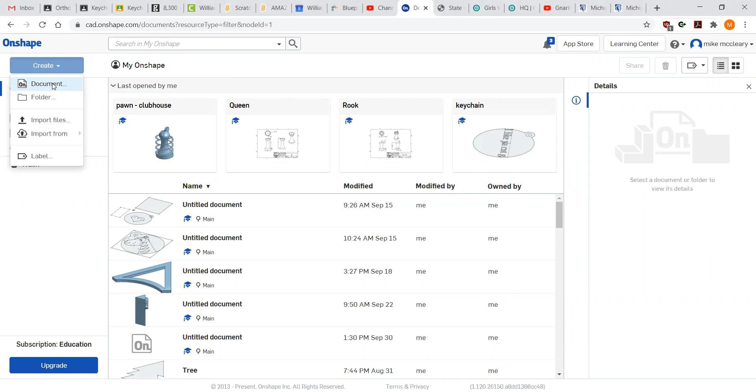Light switch toggle. We'll do a toggle one. The dimensions for the rocker are in the assignment, you can just follow those. If you have a light switch plate that accommodates more than one toggle and/or rocker, you can find the dimensions online. You just search up light switch plate 3 gang. Usually they're 3.

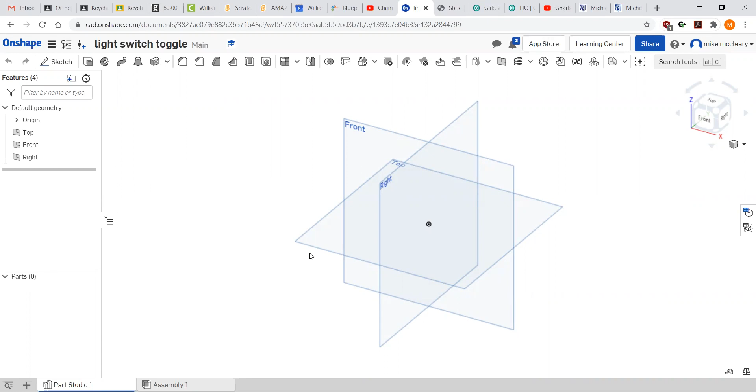If you want to do an outlet plate, you certainly may. However, I've never actually found good dimensions online. If you can find the dimensions for an outlet switch, by all means, if you find them, let me know. I will totally accept those as well. But you'd have to do a little research on your own.

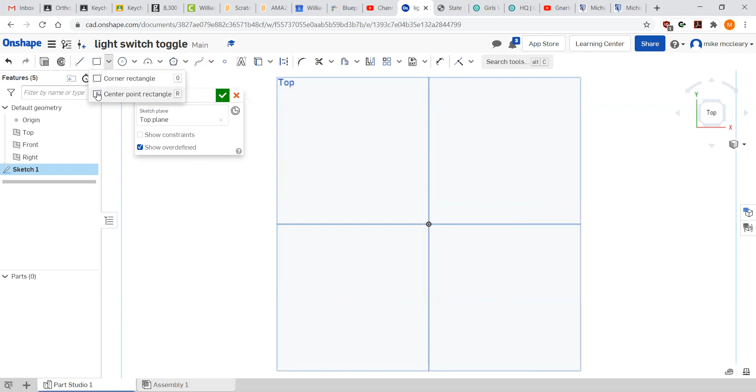All right, so we're going to start with a sketch on the top because this is going to be a flat thing. And so usually I use a rectangle, but for a light switch plate, I want a center point rectangle. I believe you've used them in the first intro. What this does is it allows it to be centered, which is going to make it a lot easier to put the holes on for both the bolts and the toggle itself.

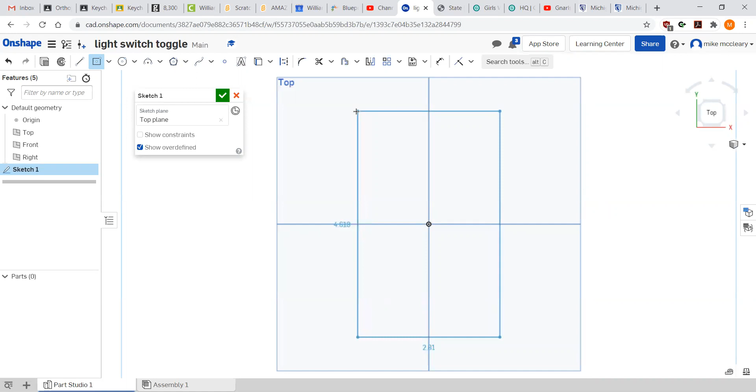And so if I go through here, it is, I believe - oh darn it, keeps on switching. Stop switching. So it is 2.75, 4.5.

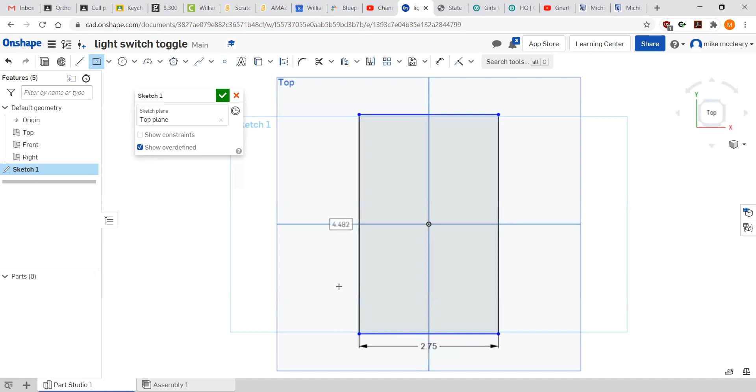And then I'll make another center point rectangle in the middle here. And since I'm making a toggle, it's going to be 3/8 or 0.375. Oh darn it, that one is 1. This one is 0.375, 3/8 of an inch. If you want it to be a little looser, you can go all the way up to 0.38.

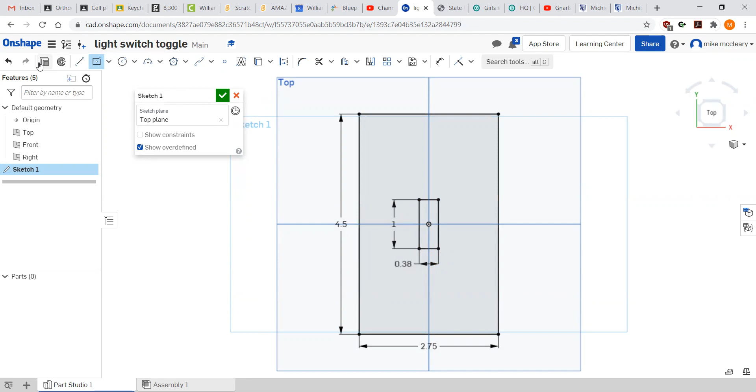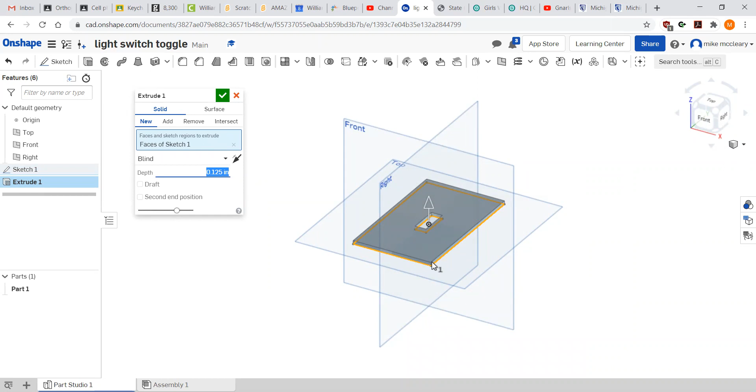It'll be fine. And then I'm going to extrude this - oh not rectangle, extrude. Going to look at it in 3D, just make sure it's showing what I wanted to see. And I'm going to do 1/8 or 0.125. The instructions show the thickness of various different materials they're commonly made out of, but this particular material on the 3D printer, 1/8 works well. So we're going to do 1/8.

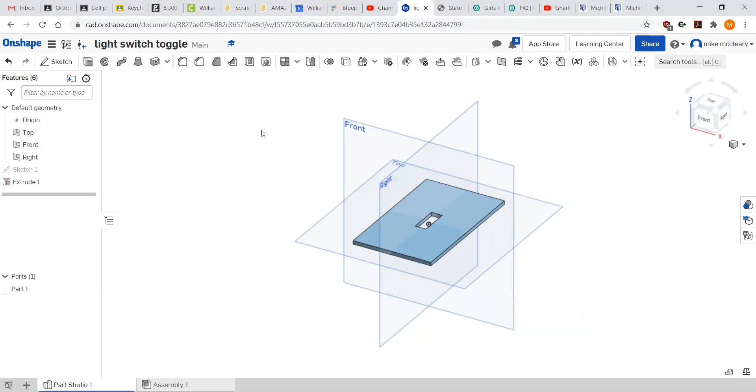You'll notice I didn't do the holes for the bolts because I'm going to use the hole command. The hole command requires different stuff than just putting a hole in it. You're going to need to put down some points, make sure the points are in the right location, use the hole command, and then tell it what bolt you're using to attach it to the wall.

So I'm going to start a sketch on the front here. Go back to the top view. And I'm going to use a point. I'm just going to put 1 point up there and put 1 point down there. I'm going to go over to dimensions.

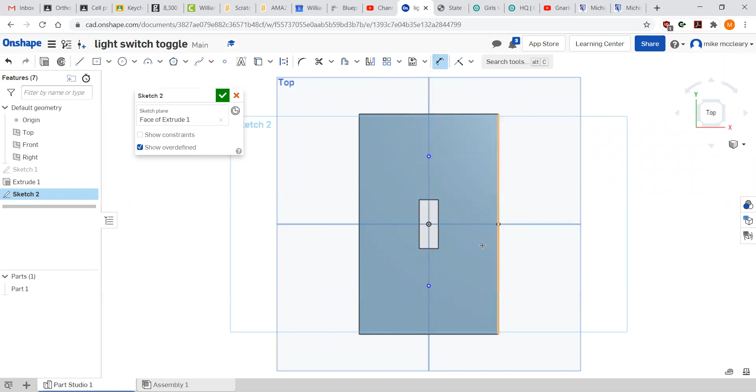Now, between these two needs to be 2 3/8. And it needs to be centered. So I'm going to do a dimension between one of them and one edge and here.

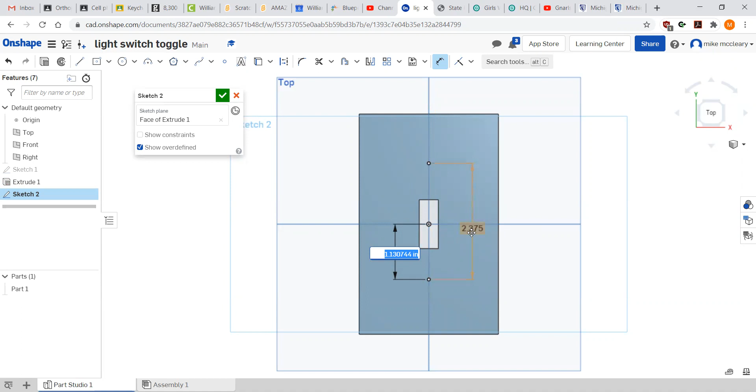Now, hopefully, you can figure out in your head how big that needs to be. I'll give you a hint. The distance between here and here needs to be the same as the distance between here and here, and they all have to add up to this. Also, the distance between here and here and the distance between here and here need to be the same. So this plus itself, x plus x, 2x, equals this. Divide both sides by 2. This divided by 2.

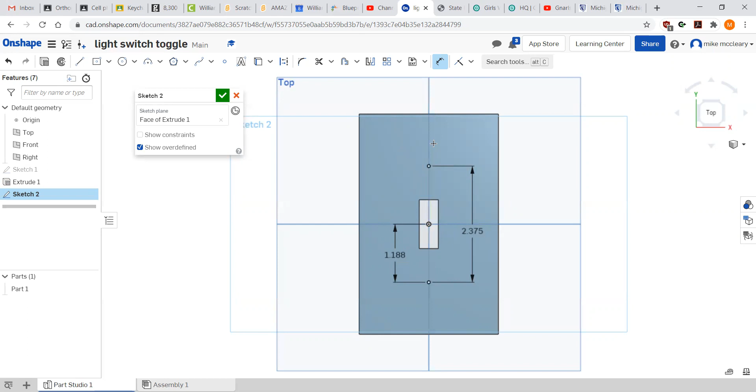And you can do division if you want. There you go. It should be on that center line. If you didn't do this, you're going to need to have some dimensions that go to the edge that make it in the center.

All right, then we're going to do a hole command. We want ANSI. We want number 6, which I believe is the default. If it's not, make sure you do number 6. It doesn't actually have anything to do with its actual size, it's just the name of the size.

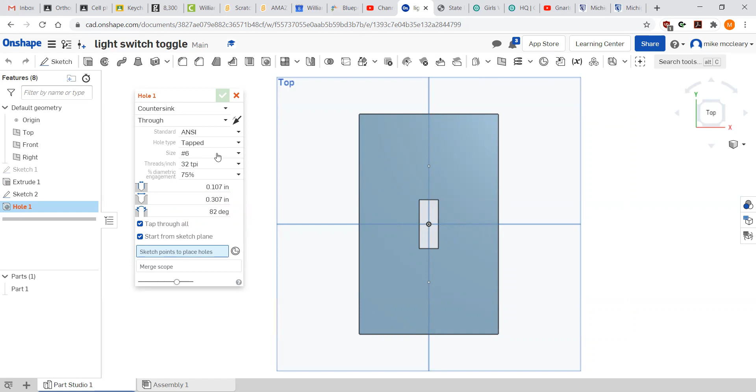And you click on both the points, and then you have some holes that are countersunk. I look again at it in 3 dimensions. There it is.

Now for everything in this assignment, you need to have a design on it. If you just give me this, if this is early in the process, I just won't accept it. If this is late in the process and you're behind, this is definitely not going to be 100%. This is going to be C at best.

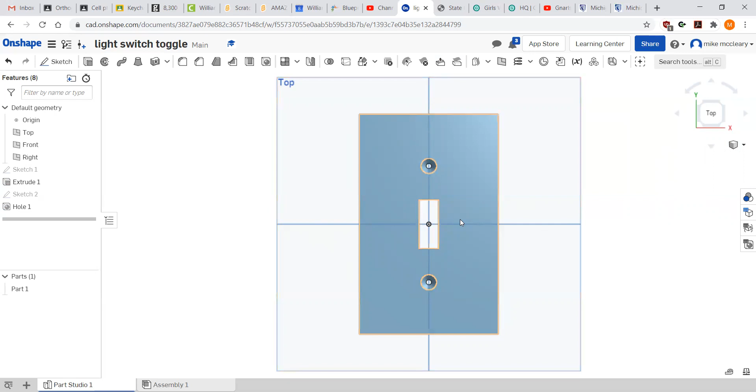Don't try to give me something that you could just pick up at Home Depot for 59 cents. Make it your own. So there's a lot of different things people have done. Put little hearts on it. Someone once made a little snowman with little snowflakes going. It took forever to print, but it looked really nice when they were done.

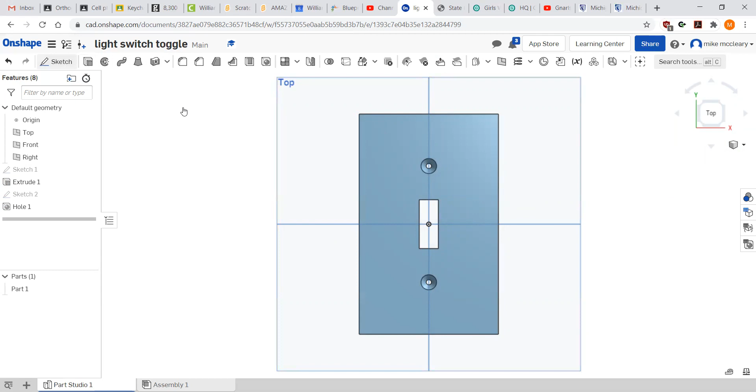One design that I always enjoy, and because I keep using it as an example, people do it every so often. Going up here and - see how well I can draw this. Why are these not... oh, so, there we go. It wasn't selecting the sketch.

All right, I'm just going to draw it loosely because I can. And then there's text. There it is.

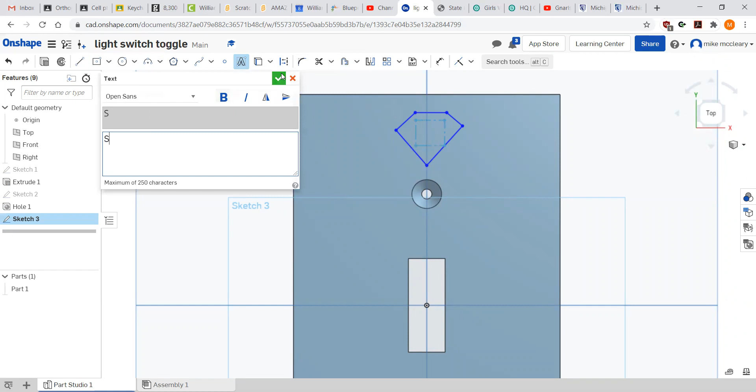People do a better job when you have more time. Down here, let's see how well I can draw this freehand.

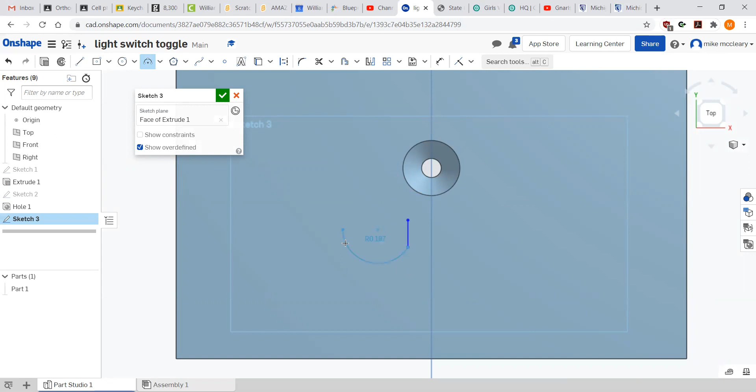The answer is pretty poorly. It is not a really good job, but hopefully you'll be able to see what I'm drawing at the end here.

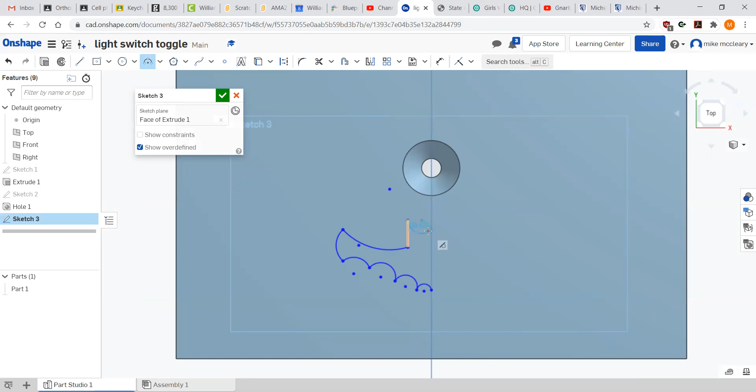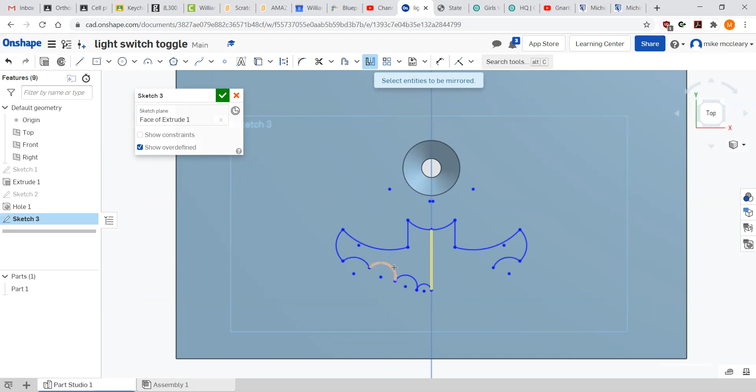Mirror this guy. Mirror line. Entities to be mirrored. All right.

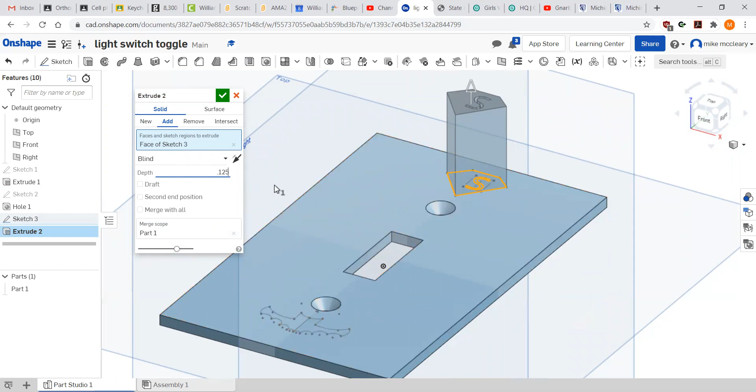And we've got Superman in the light. Let's do it 1/8 of an inch about. And Batman in the dark, because he draws his energy from the sun. He's the Dark Knight, up, down.

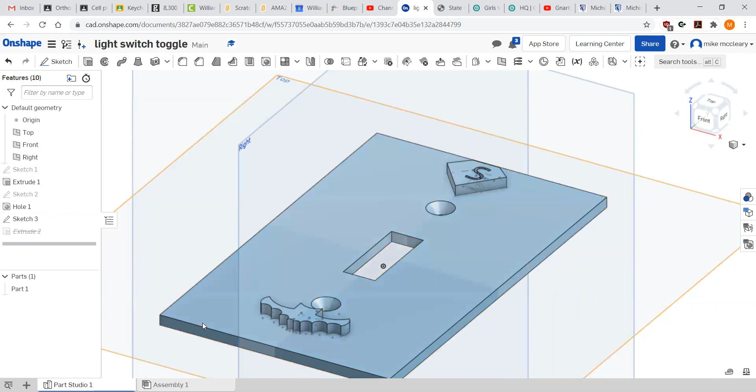I enjoy it. I'm just going to hide those guys, though, for now. Suppress. Hide. Oh, why are you not hiding? There you go. Other things people have done.

This is kind of the laziest one, but people still do it. When you're doing this, let's make sure it's not doing its align thing. All right, well, make sure that they're even if you're doing this one.

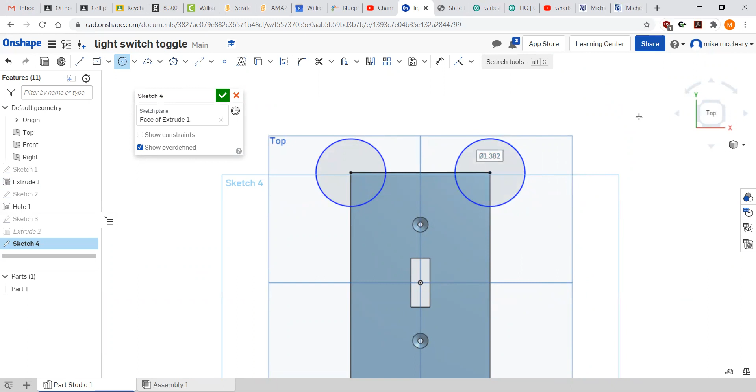This is just covering up a wall. As long as you cover up the hole in your wall, you can do this. You can go outside the bounds of a light switch plate, which is fine. If you make it too large for the 3D printing plate, I will return it and say this is too big, you can't do this. But as long as it's physically possible to print, yeah, you can totally go outside.

I've had different Pokemon, cats, fox faces, various animal shapes. Of course, Mickey Mouse. Lots of palm trees and waves and beach scenes have gone into this.

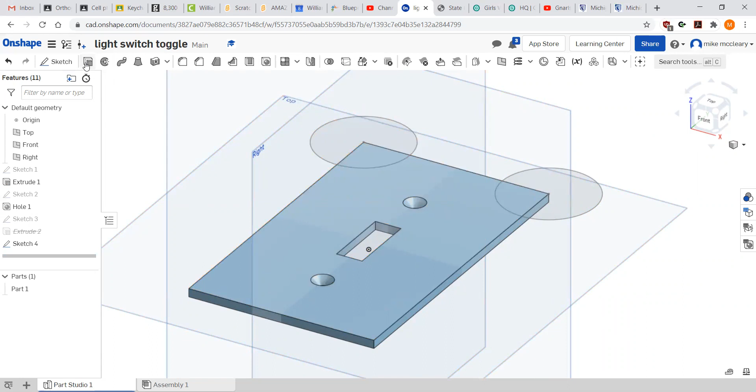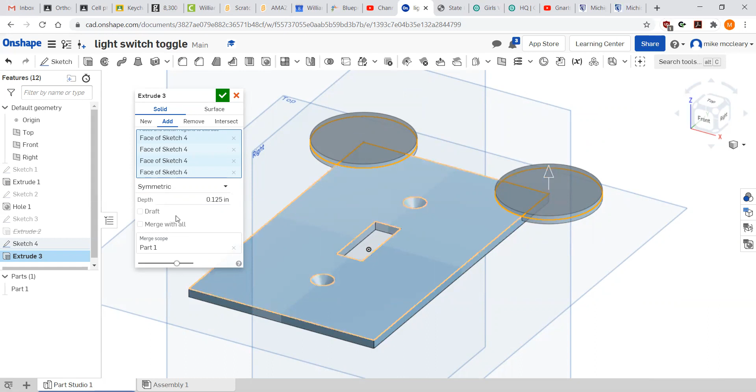One thing though, if you're going to go outside, make sure that you are going behind so that it lines up with the back. So I'm doing symmetric at 1/8. Since this was extruded an eighth, it goes 1/8 of an inch up and 1/8 of an inch down. Or I can change the direction and go just 1/8 of an inch down. But it should, when you look from the side... oh, something went wrong there. No.

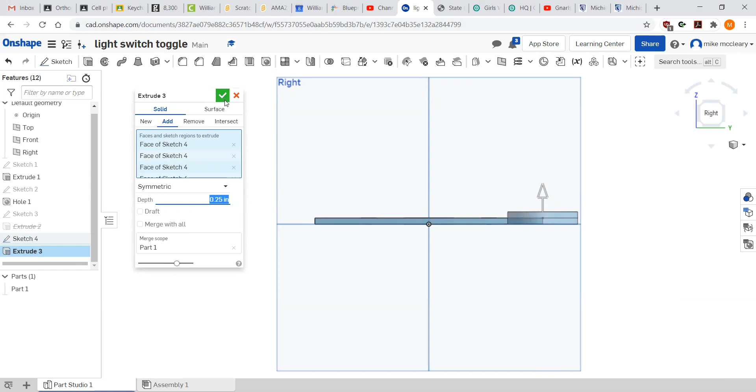A little different in this one. 1/4 of an inch, because 1/8 of an inch total... so 1/4 of an inch total, 1/8 of an inch down, 1/8 of an inch up. It needs to line up with the bottom, or else it's not going to print well. Basically, you're going to get stringy bits underneath the ears, and they're going to curl, and it's just going to look bad. At worst, it'll just ruin the entire part because it'll warp everything, and it won't do what you're looking to do.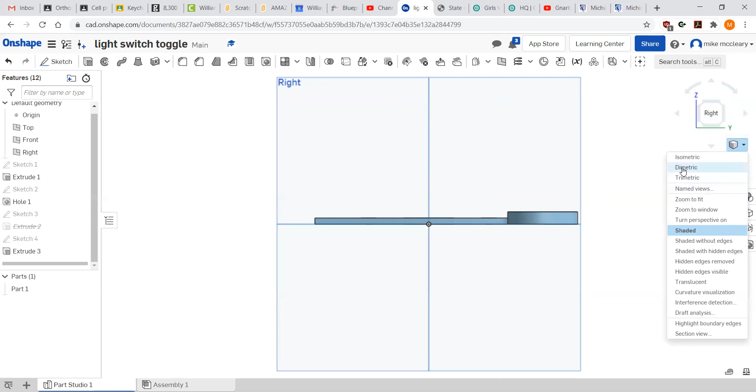So making sure you match with the outside - not important. Actually, wait, one more thing: 0.125. Let's go and do these as a fillet. It looks nicer.

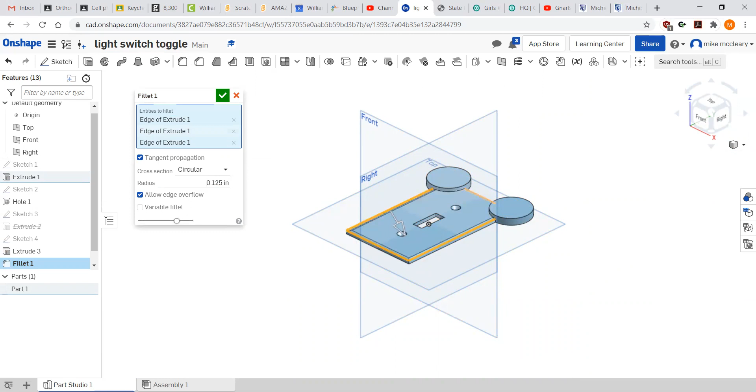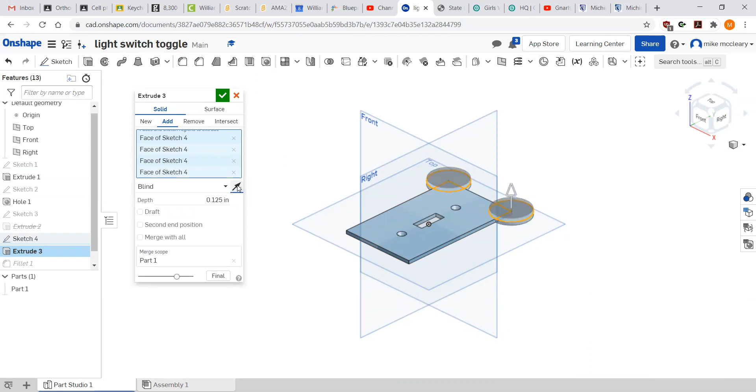I waited on the fillet till the ears were drawn, so it looks like that. If you wanted to do the ears like this, extrude by 1/8, and instead of symmetric blind, change the direction there. You'd also fillet there. It becomes one continuous fillet.

You should probably fillet the edges, particularly if you're doing a square one. It looks a lot nicer and doesn't look like you're just screwing a piece of plastic into the wall.

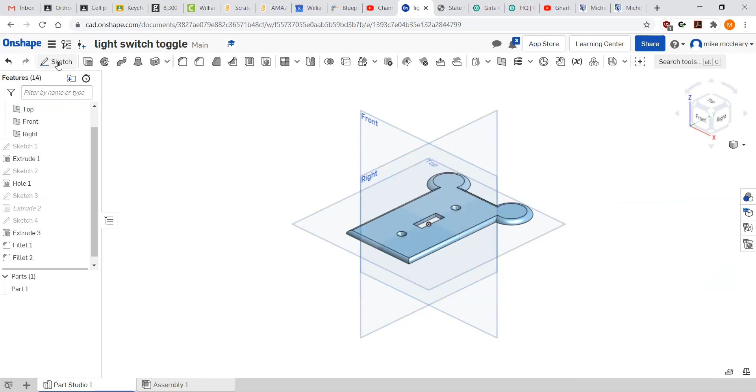These ones have the tendency to be a little easier than the lights or than the cell phone cases. It gives you a little broader canvas to do a design on. Generally, they're less popular because people like cell phones.

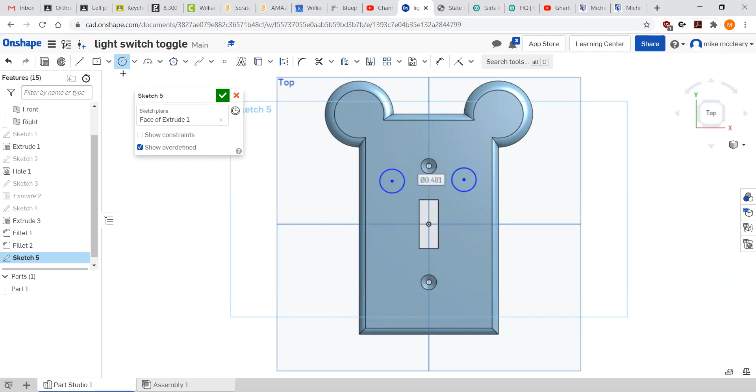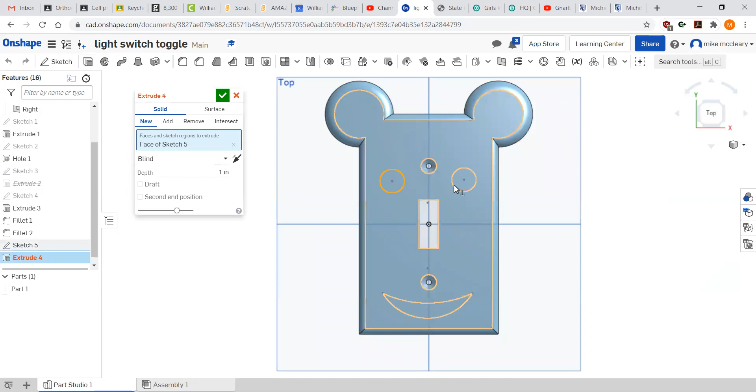But these will also last you a lot longer, because if they sit there on your wall, they're not going to break when you get a new cell phone. You don't need to change out your light switch plate. These will generally stay in place for years, as opposed to a cell phone case where you'll keep it for a while, and then it'll go away.

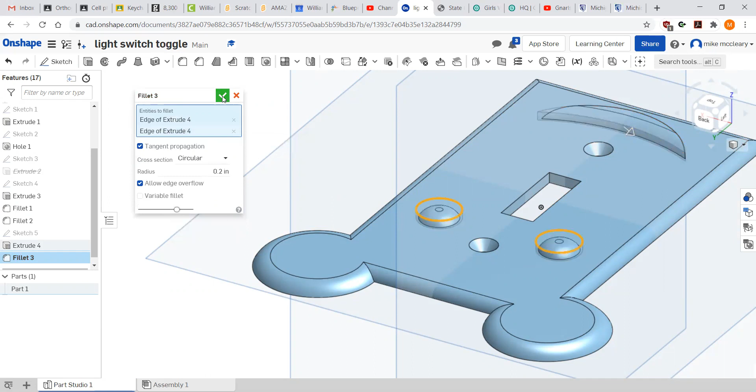But even though I say that I like them, they are in fact less popular than the cell phone cases.

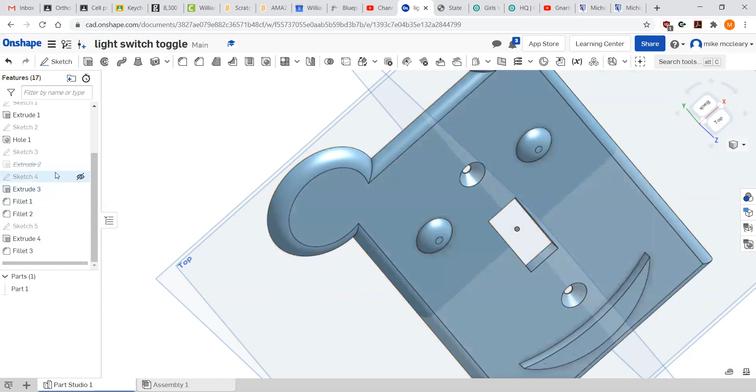So there's one that says hello, or you can say hello and... oh no, that's not what I wanted. I wanted this one to be unsuppressed. And now it is a Batman, Superman, Mickey Mouse, whatever.

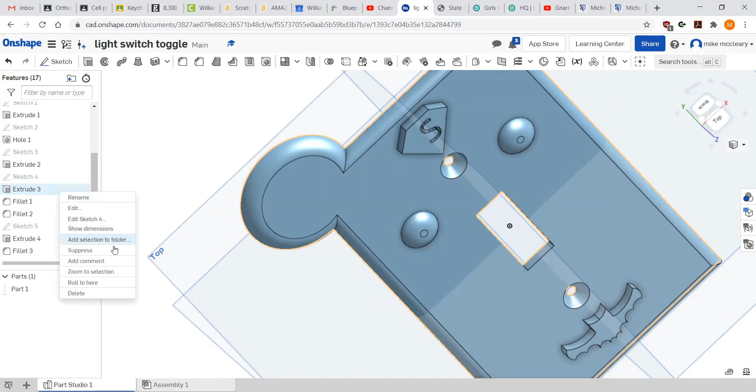It looks weird. Let's go suppress that again. Suppress. Oh, did I suppress the wrong one? I may have suppressed the wrong one. It was this one I should have suppressed. So unsuppress - there we go.

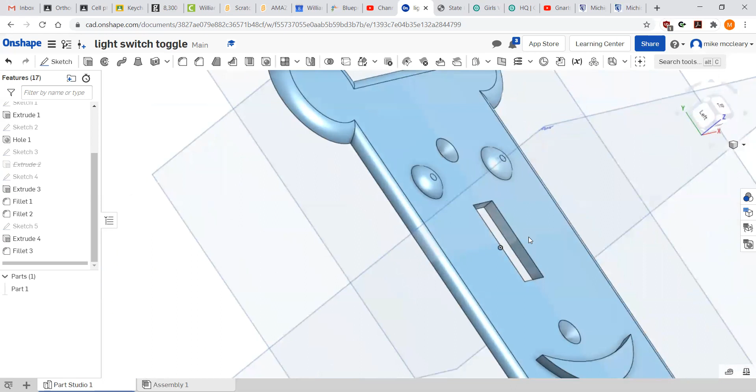All right, so yeah, once you get this done, you can turn it in. Make sure you specify the color, the proper name of the color as is listed from the picture I have of all of the little different chips of color that I currently have.

All right, I think that is it for this.